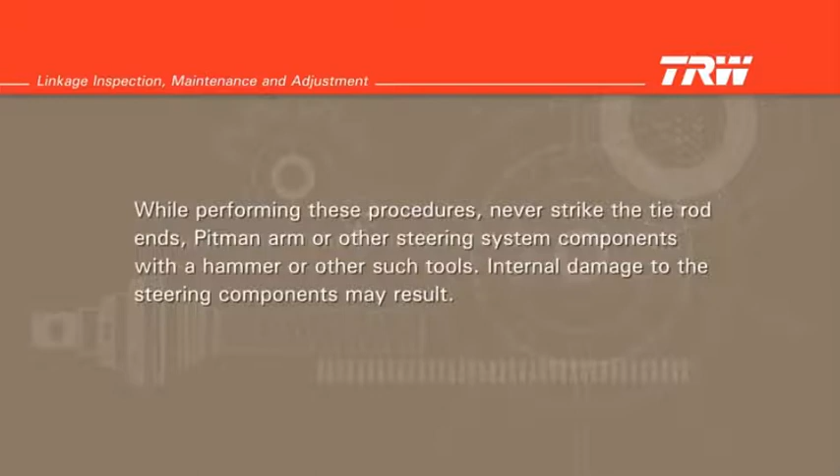Prior to making a repair, refer to the appropriate service manual for additional information. Take all the necessary precautions to ensure both your safety and the safety of others around you. If you are not sure how to perform a procedure, consult your authorized TRW technical representative. While performing these procedures, never strike the tie rod ends, pitman arm, or other steering system components with a hammer or other such tools.

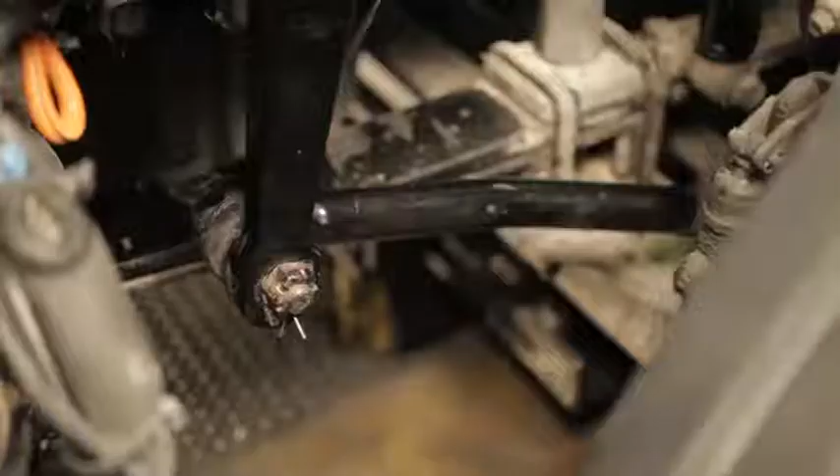By lightly rocking the steering wheel, observe any looseness in the two mating tapers or any movement of the stud nut. Looseness in either place requires further inspection. If either of the mating tapered parts show distortion or wear, both parts must be replaced.

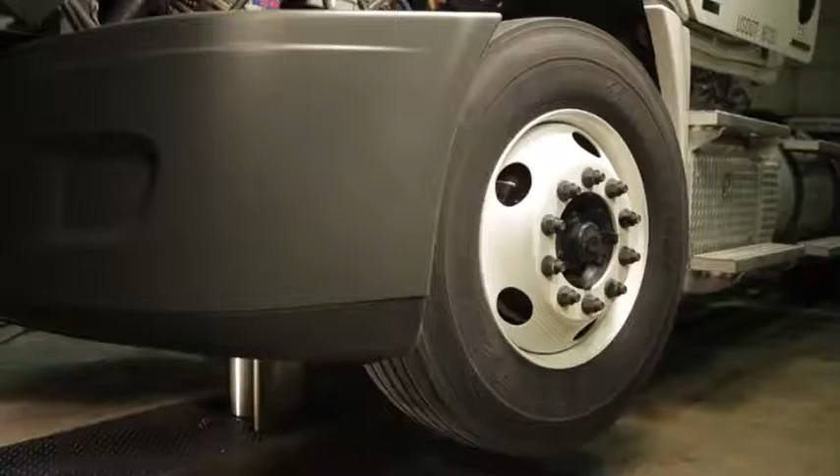Make sure the wheels are straight ahead, the truck engine is turned off, and no force is being exerted on the linkage by the steering gear. To check the soundness of the joint, use your hand to push and pull the tie rod end in and out in the direction of the ball stud.

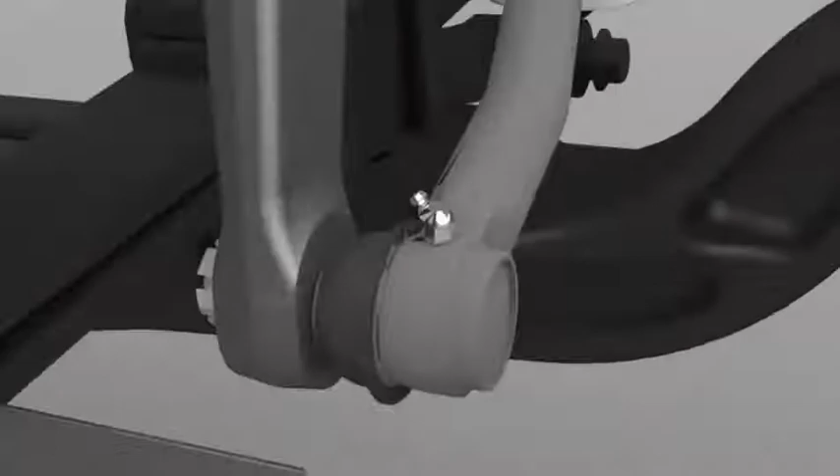For inspection purposes, hold the linkage without twisting while applying no more than 100 pounds of hand pressure force. Measure the in and out motion on the ball stud axis with a scale. If the total in-out motion on the stud's axis measures more than 1/8 of an inch or 3 millimeters with hand pressure only, then the vehicle should be taken out of service.

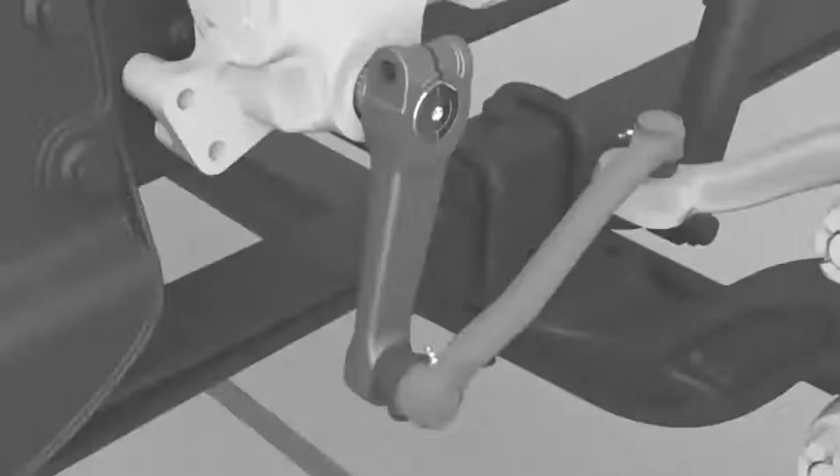If it moves but measures less than 1/8 of an inch or 3 millimeters, it should be replaced at the nearest practical service center. Any movement less than 1/8 of an inch or 3 millimeters is strictly a maintenance issue for the vehicle. Do not use a wrench or other object to obtain more leverage. Applying leverage to any linkage can cause movement, regardless of whether or not the linkage needs to be replaced. Applying leverage can also damage the linkage and cause linkage separation.

During inspection, do not apply steering gear power with the engine on. This would produce normal movement, which is not an indicator of tie rod end wear. Use hand pressure only, with the engine off and the road wheels straight ahead, to check for tie rod end wear.

When lubricating tie rod ends, also visually inspect for cracks, breaks, or bends in the linkage components, broken clamps, and gouges on tubes from rubbing parts, and missing or damaged grease fittings. Some tie rod ends are not equipped with grease fittings from the factory. However, if a grease fitting should be there and it is missing, it must be replaced.

Check the seal for any form of tear or improper sealing. Also check for wear on the socket throat. Check all tie rod end connections for missing cotter pins.

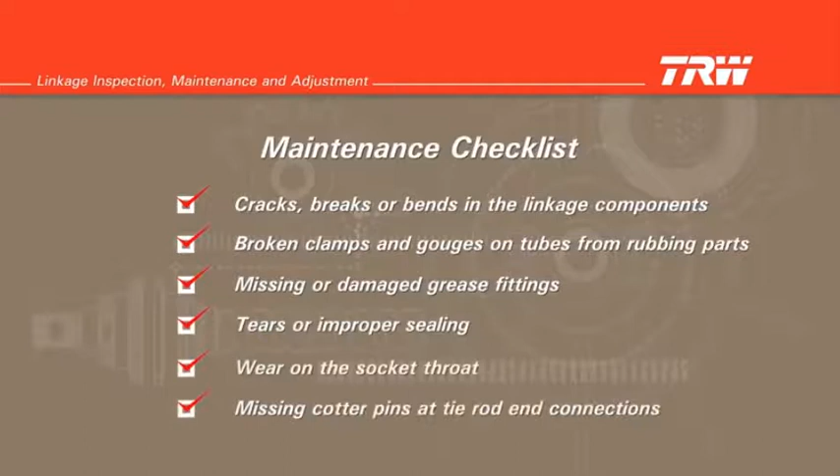Tie rod end replacement.

If the lash is originating from the tie rod end, it will need to be replaced. If the lash is in the tapered stud connection between the tie rod end and its mating part, both the tie rod end and the mating part must be replaced to ensure a proper fit.

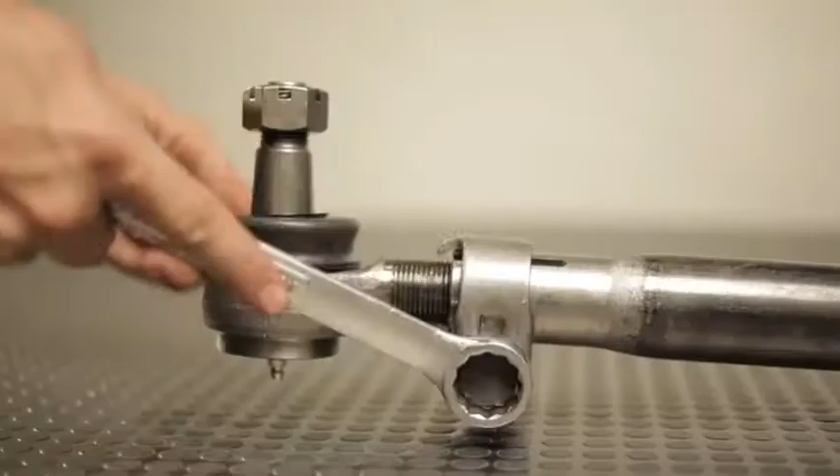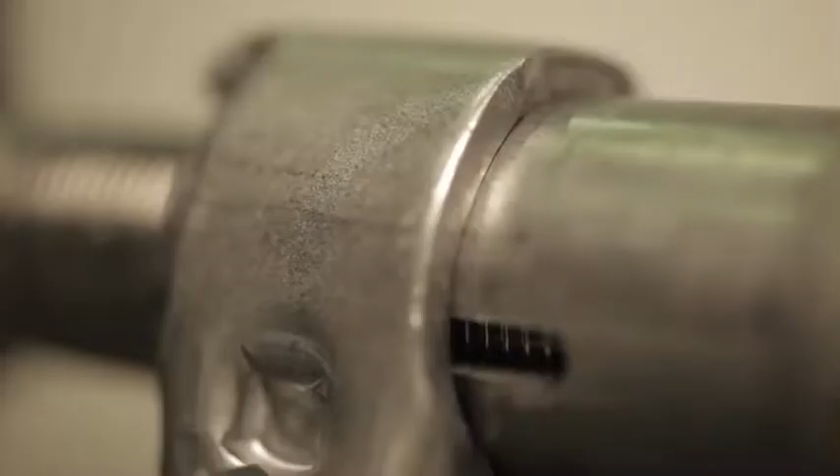In order to replace the tie rod end, loosen the clamp or jam nut. Unscrew the tie rod end from the tube. Install the new tie rod end by screwing the new end into the tube. Tie rod end threads must be visible the entire length of the cross tube slot. The tie rod end is to be engaged at least one thread deeper than the end of the cross tube slot. Use the correct adjustment and centering procedures for the type of assembly being serviced.

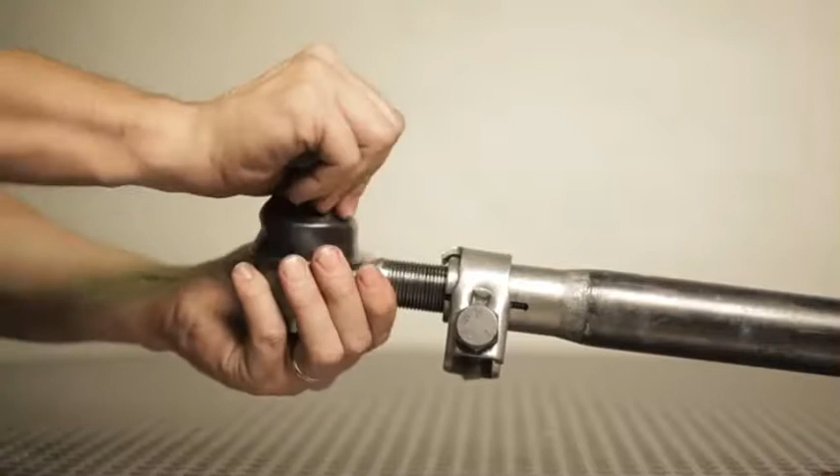One-end adjustable drag link.

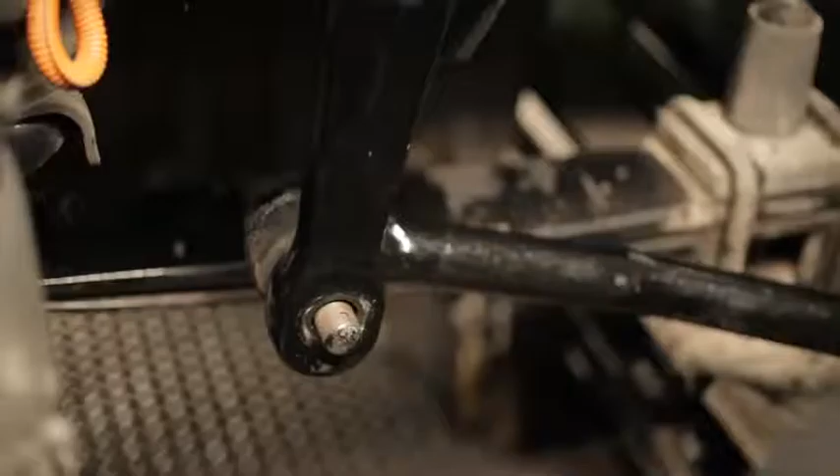Position the road wheels straight ahead and disconnect the drag link at the pitman arm. Make sure the steering gear is on center by aligning the gear housing and output shaft timing marks.

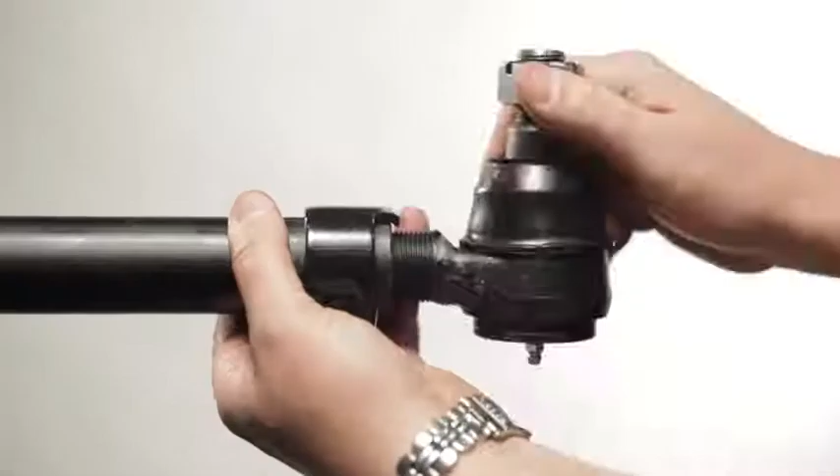Loosen the clamp on the drag link and adjust the drag link length to fit the holes in the pitman arm and the axle arm. Reconnect the drag link at the pitman arm and torque the ball stud fastener.

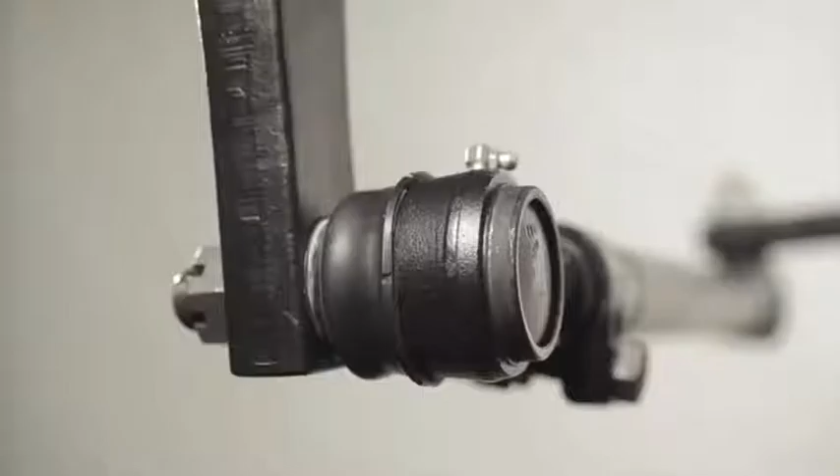Replace the cotter pin. To center the drag link, grasp the long side of the drag link with both hands. Rotate the drag link away from you as far as it will go, then toward you as far as it will go. Center the drag link between these two points.

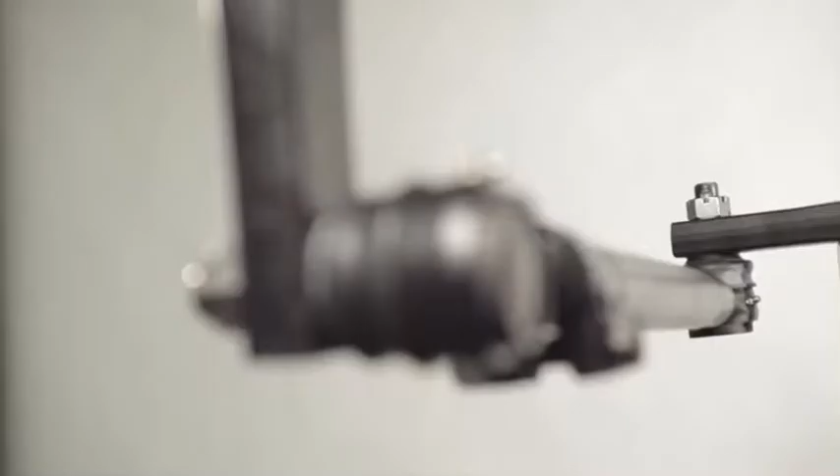Hold the long side in place. Grasp the short end of the drag link and rotate it as far toward you and away from you as it will go. Center the short end between these two points. With both ends centered, tighten the clamp.

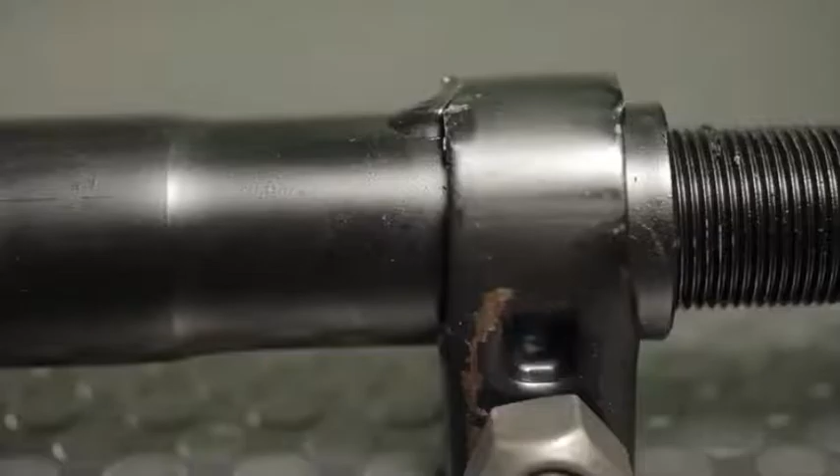If the clamp is tack welded, do not remove the tack weld. If the clamp is free to rotate, it can be properly tightened in any position, provided the clamp clears all other components when the wheels are turned in both directions.

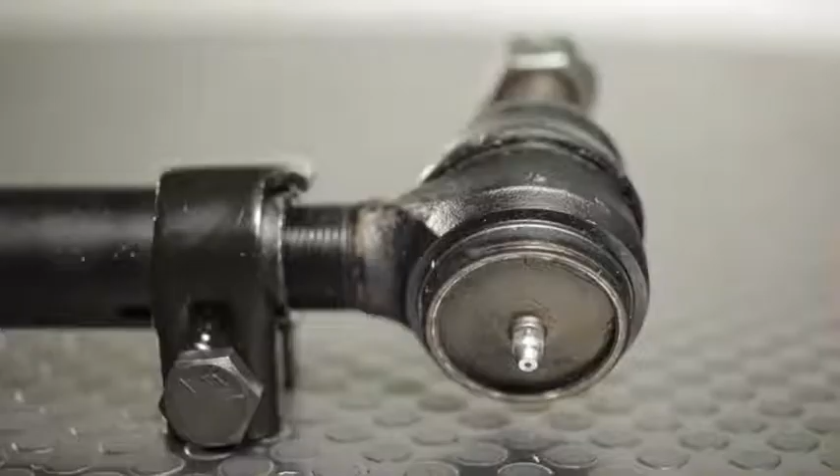Lubricate the tie rod ends with OEM and TRW specified grease until you can see clean grease coming out. Torque all fasteners to OEM specifications.

2-end adjustable drag link.

Position the road wheels straight ahead and loosen the clamps on both ends of the drag link. Rotate the center tube until the steering gear is on center, with the housing and output shaft timing marks aligned.

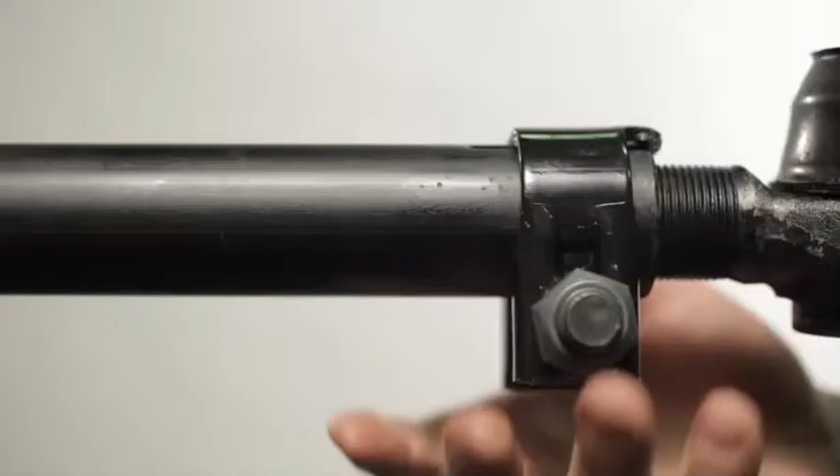When the marks are aligned, tighten the clamps. Remember not to remove a tack weld and to check for clearance if you change the position of a free-to-rotate clamp.

Lubricate the tie rod ends with the OEM and TRW specified grease until you can see clean grease coming out. Torque all fasteners to OEM specifications.

1-end adjustable tie rod assembly.

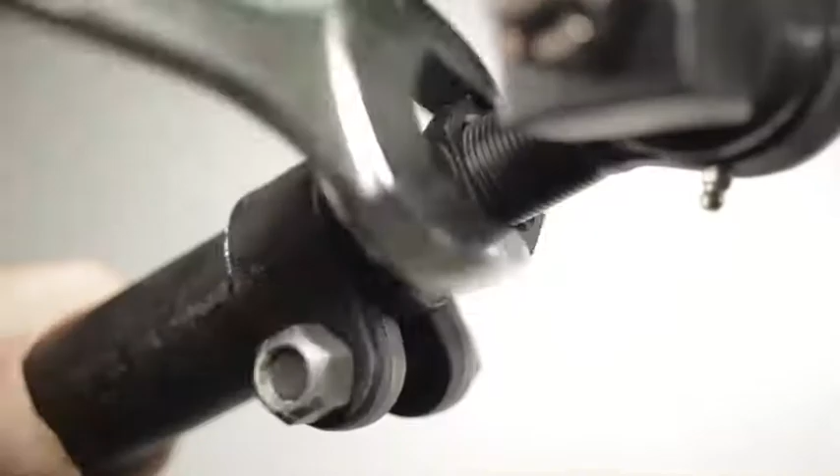Position the road wheels straight ahead and lift the front end of the vehicle. Loosen the clamp on the tie rod tube. Turn the hex adjuster until the toe is correct.

Grasp the long side of the tie rod with both hands and rotate it in both directions, then back to center. Hold the long side in place and center the short end of the tie rod by rotating it as far as you can in both directions.

Center the short end between these two points. With both ends centered, tighten the clamp.

If the clamp is tack welded, do not remove the tack weld. If the clamp is free to rotate, it may be properly tightened in any position, provided there is enough clearance from other components.

Lubricate the tie rod ends with OEM and TRW specified grease until you can see clean grease coming out. Torque all fasteners to OEM specifications.

2-end adjustable tie rod assembly.

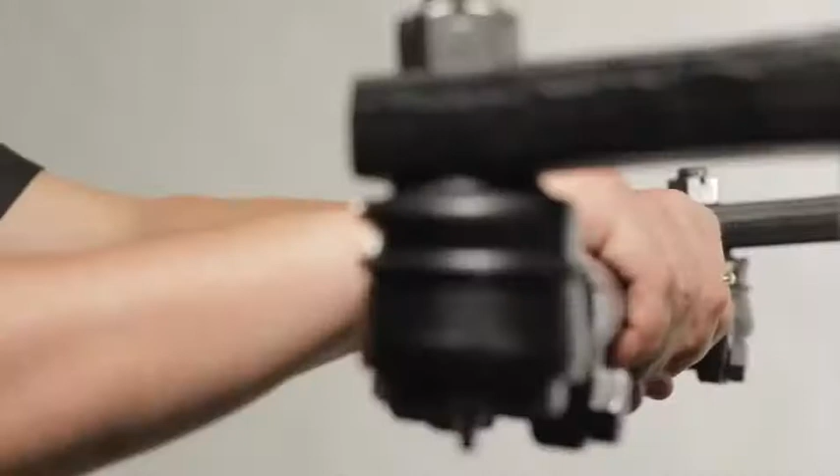Position the road wheel straight ahead and loosen the clamps on both ends of the tie rod. Rotate the center tube of the tie rod until you achieve proper toe-in measurements on the front wheels.

Tighten the clamps. Remember not to remove a tack weld and to check for proper clearance before repositioning a free-to-rotate clamp. Lubricate the tie rod ends with OEM and TRW specified grease until you can see clean grease coming out.

Torque all fasteners to OEM specifications.